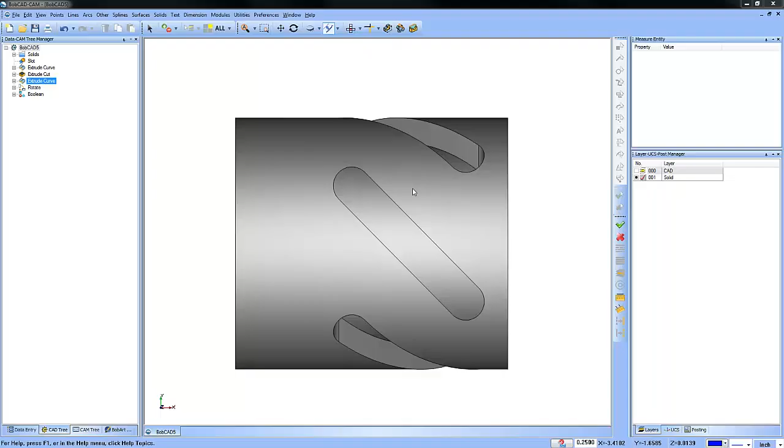Hey everybody, it's Al. So today I wanted to take a look at creating this helical groove here along this cylinder. It's actually really simple to do.

If we look at my steps here, if I just undo what I've done and turn my wireframe on, you can kind of see the steps. We started with... let me turn my axis display on. I'll go to a top view.

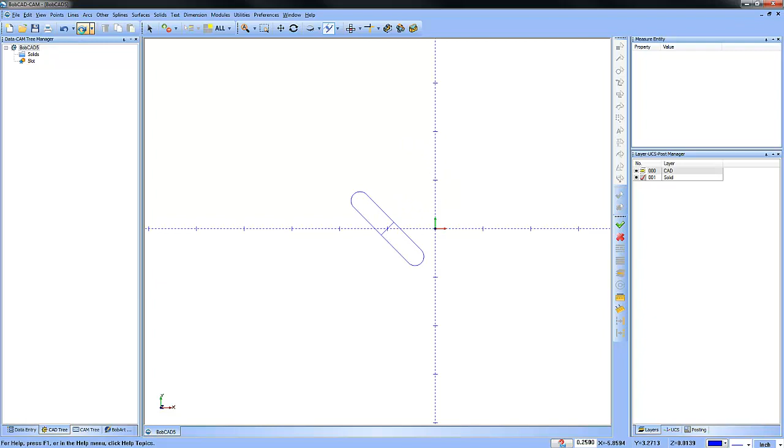Okay, so I started with a slot shape out of the shape library, and then I just moved it to center, moved it back a little bit, deleted some geometry. I drew one circle on the front of the part, another offsetted circle, did an extrude curve to extrude the shape up, cut it away with an extrude cut.

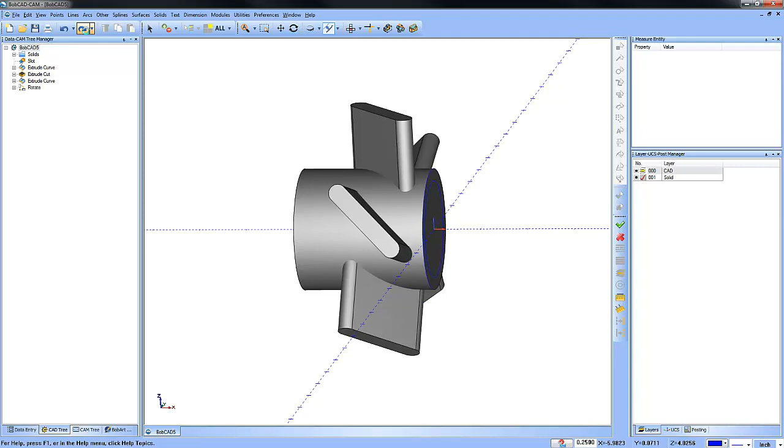Then I went ahead and extruded a curve again for the solid, and then created a pattern. So I rotated these around and made copies, and then I booleaned it away. So those were the steps that were used to create this.

So let's go ahead and start from scratch. Okay, so we're going to go to Other, Shape Library. We're going to use a slot and say OK.

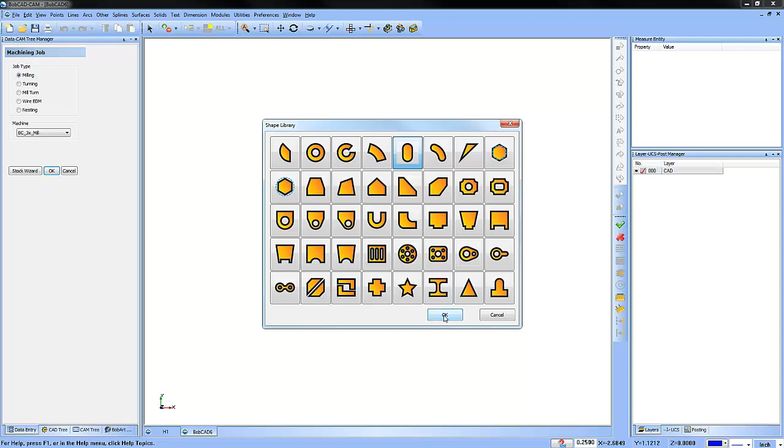Here we can change the width of the slot. Here we can change the length of the slot. And then this one here is for the angle of the slot. So I just put it on a 45, but you could make it any angle you may want it to be. And we'll say OK.

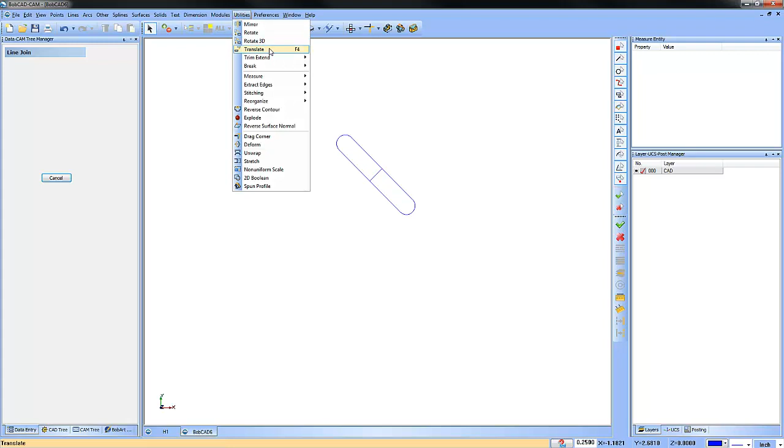So that was step number one. Step number two, I just joined a line between here and here. And I did a translate to center.

So we're going to pick the center of this and move that to 0. And we'll say OK. From here, what I did is I just moved this back a little bit.

So we're going to do like maybe a drag. We're just going to pull it away from the face of the part. And we'll say OK. And then we'll delete this geometry here. So that's the first piece.

The second thing we're going to do here is we're going to go to the side. And we're going to draw a circle. So we'll make this one a 1-inch circle, and we'll say OK. And this one's going to be a 125, and we'll say OK. So those are those two portions of geometry.

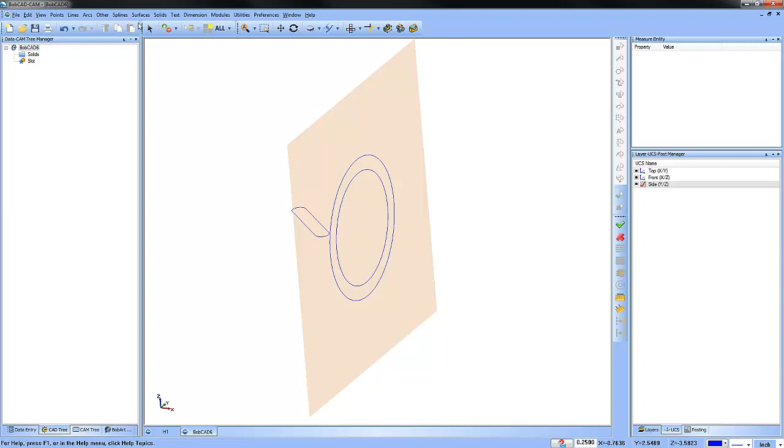Now we have our extrude function. So we'll do solid, extrude curve, shift click to get this one here. We'll pull this up the line, and we'll say OK.

The next one is going to be solid, extrude cut. We'll click on our circle and we'll intersect these two bodies here, and we'll say OK. So that gives us that one.

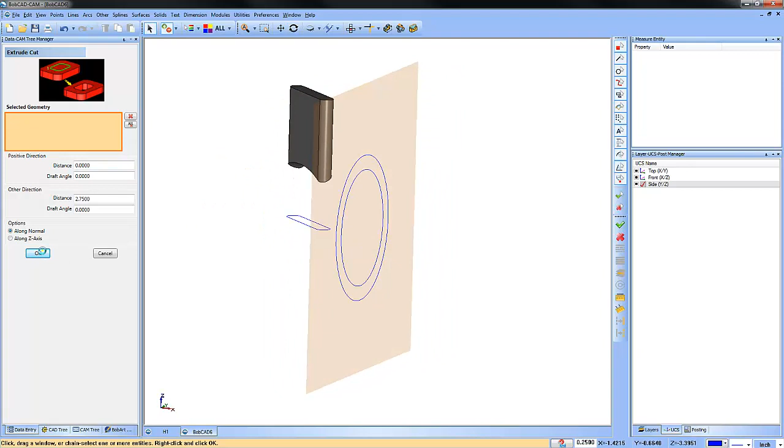Then we're going to do an extrude cut. We'll select this one here and we'll say OK. So that gives us those there. OK, so we're almost done.

The last thing we need to do here is to do a rotate. So we'll do utilities rotate. Select our shape. We want to go around in red. Red would be for X. So we'll say 360 divided by 5.

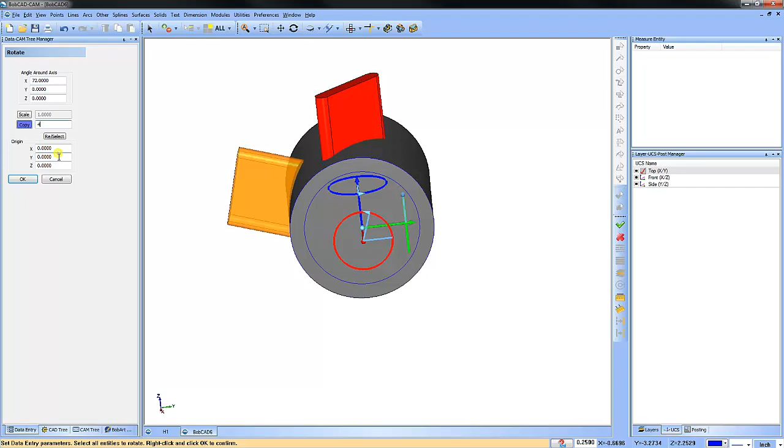Okay, we can add our copies. We have 4 copies. It's going to be around 0. We choose OK. So that gives us that geometry there.

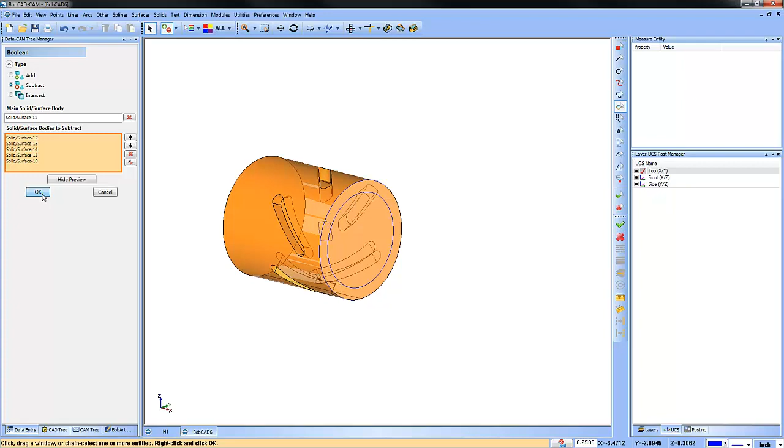And then the last thing we're going to do is solid subtract. Keep the shape that we want to, or click on the shape we want to keep. And then we can select all the ones that we want to get rid of. We can show a preview here to make sure that it looks the way that we want it to. It does. We're going to choose OK and then cancel.

And that's just a quick lesson on how to draw some helical slots around an OD. Look forward to seeing you guys in the next one. Thanks.